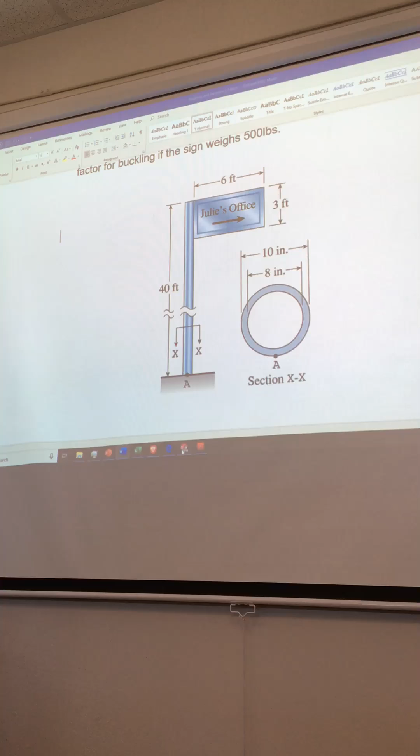Let's go back to my model and features, and go back to this sketch and edit the sketch, because I've got something that's 40 feet tall. I'm going to go up here to the top, and I'm going to add a line to it. Come on. It's not happy about adding a line.

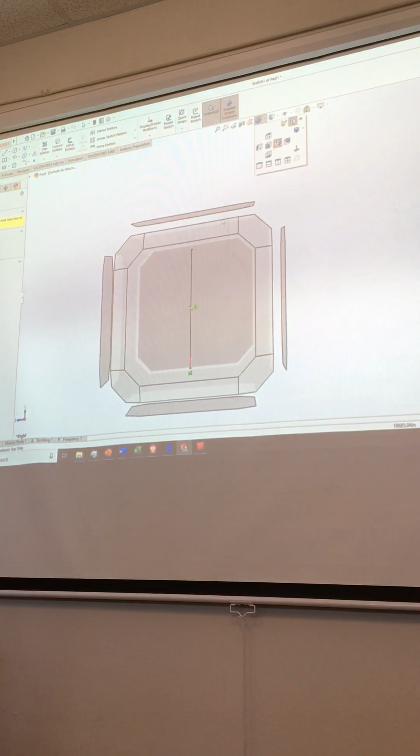Are you unhappy with the view I'm in? Yeah, you're unhappy with the view I'm in. Okay. There we go. Unhappy with the view I'm in. Okay, so let's make a line out here, and I'm going to make this line something like, what, 36, just to say it's to the middle of the sign.

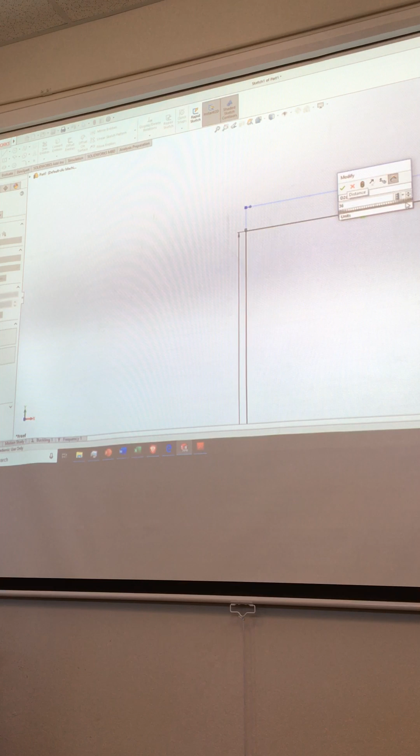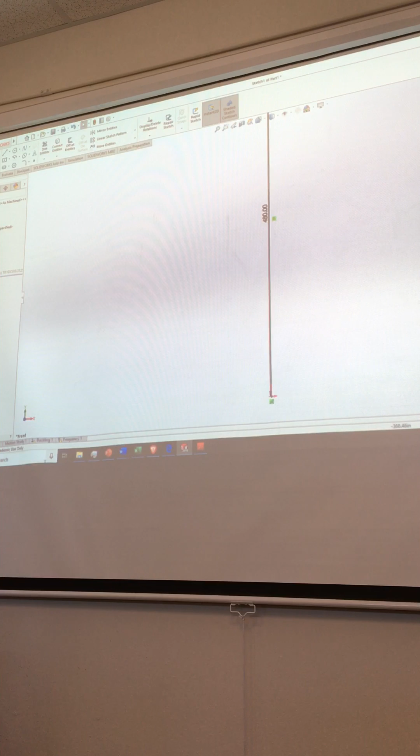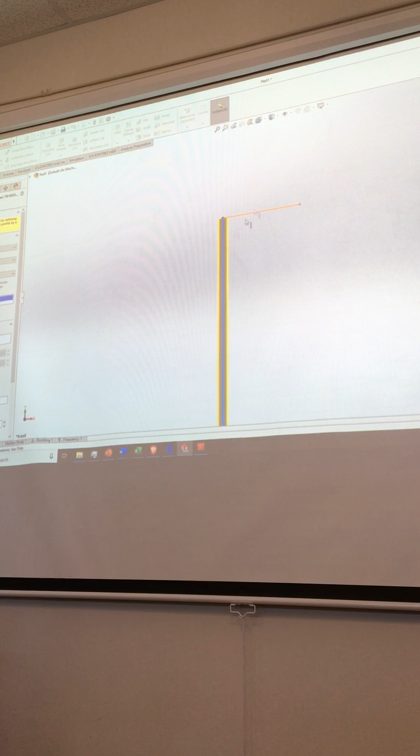Okay, so now I've got a beam with a hook on it at the top up there, and I'll get out of the sketch. Right, and I've got my perfectly fine tube here that I'm going to edit, and I'm going to add that other line segment here to the top, so we can make it the same.

Well, again, are we doing any analysis at all on the sign? No. No, we're doing analysis on the pole. So what we model, what we use to represent the sign doesn't matter, right? Because it's just something to carry the loads out over there, right? It's just something to get the load off the center.

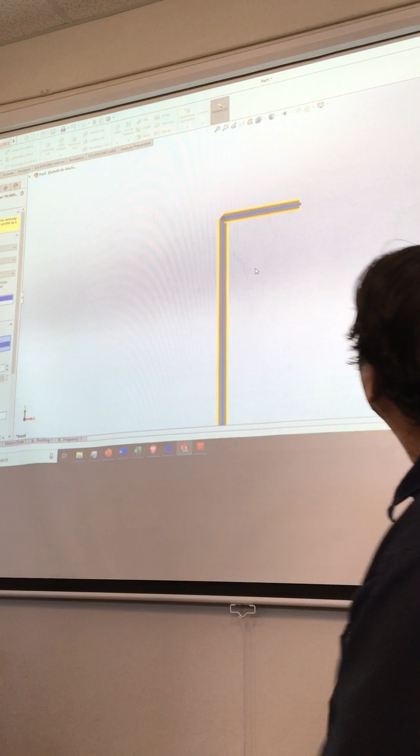Now, can it be at weird and strange orientations? Yes, it can be. And if I've done mine weirdly, probably. But okay. Remember, I've got rectangular tubing or something else that can be weird going on here. Right, so I've got rectangular tubing laying flat. Do I care? Not really. Okay, we can go see if it actually does anything, right? Okay, are we good with this? Right, we just have this out here.

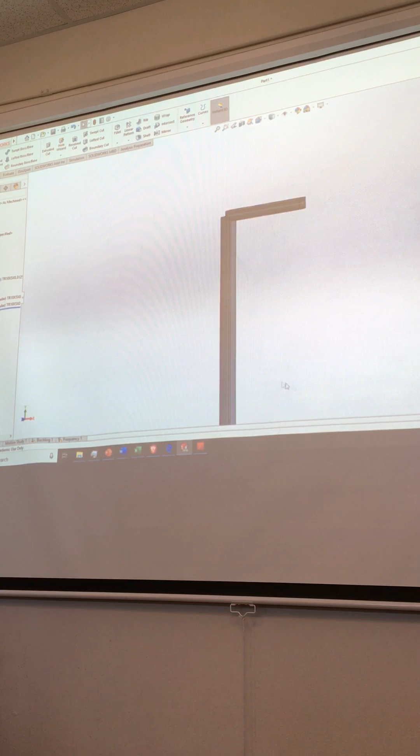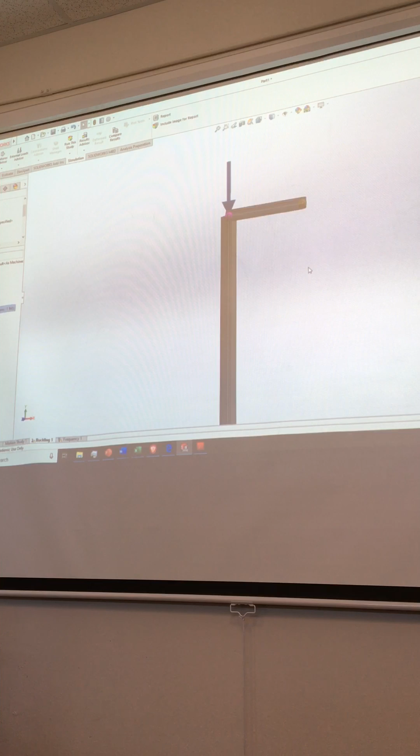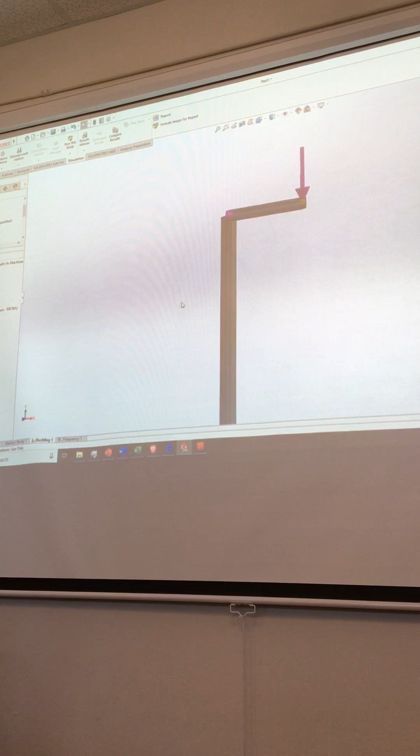Now I go back to my buckling analysis here. And of course, everything's broken, right? Because it has parts that it doesn't know. Need to recalculate the joints. Probably, if I edit this one, I'm going to move my force from where it is, delete that guy, and put it over here. And I'm just going to say, for the sake of argument, I'm going to put 500 pounds on it. Not that it matters, it's just going to give me a load factor representative to 500 pounds.

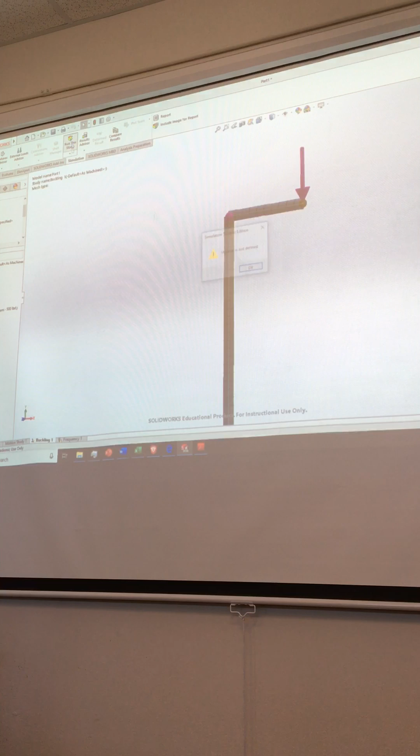Okay, I'm going to mesh this guy. It all looks meshed. And I'm going to run this, and it says I haven't defined the material because I added a new beam and it doesn't know that it's the same stuff that we used before. You'd think it'd be smart enough to do that, but it isn't. So, okay.

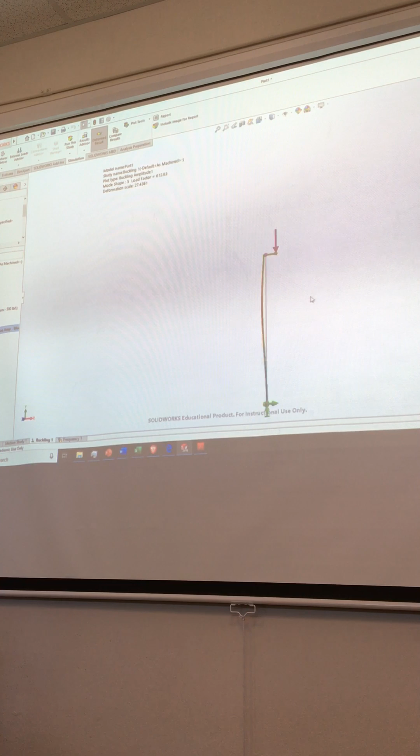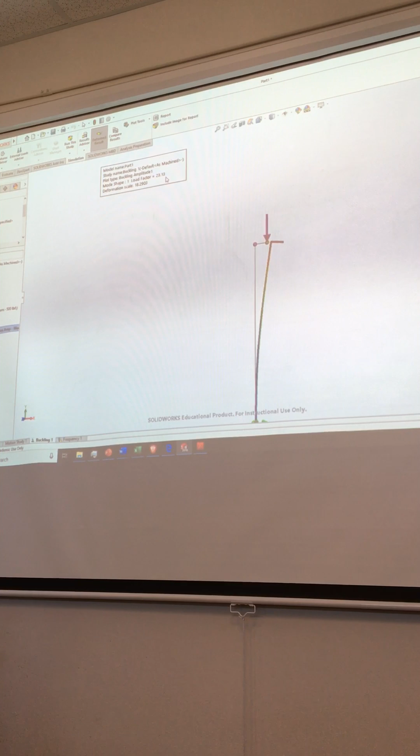Okay, now again, we're getting a mode of failure here. And now my load factor is about 600. 600 times 500. That's mode shape 5, I should say. Let's go back and get it to mode shape 1. Mode shape 1, I have a factor of 23, and 23 times 500, that's 11,500, which is really close to where it was before we put the sign on it.

Okay. Which is sort of telling us that the sign's not doing a whole lot if it's only off that much, right? We can ignore it. Well, you can at least have numbers to tell your friends and relatives about. Okay, does that make a little bit of sense there?

Now, when you do it with solids, is it going to be that easy? Yeah, it's going to get a little bit harder. One of the things that can happen with solids is, I mean, I can turn this into solids. Like I can model this as a solid, and it will probably error out. First of all, it's really way too thin.

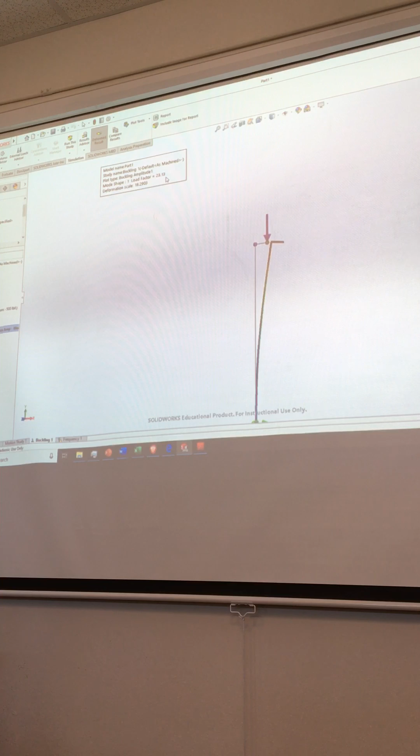It's 5/16 thin, and so the number of elements it gets in a 40-foot beam when they're only 5/16 thick, the wall thickness is going to be ridiculous, right? So I'm going to watch. One of the reasons I gave you something that was an inch thick, right, so you at least get a little bit better elements before it gets really